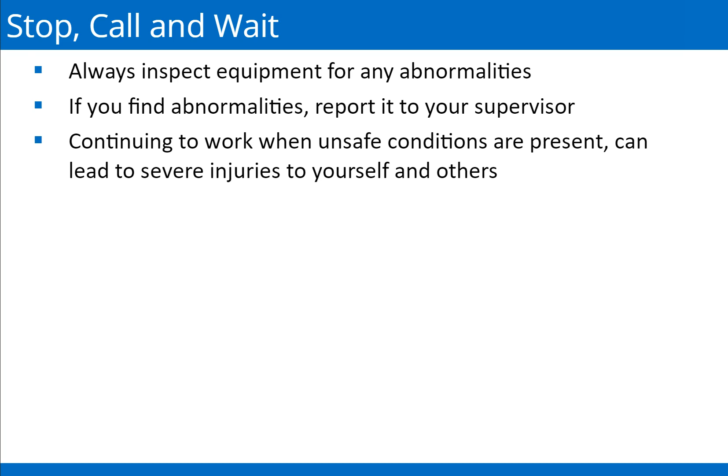When you observe an unsafe situation, follow this sequence of steps. 1. Stop. Stop what you are doing and press the emergency stop. 2. Call. Immediately call your supervisor or manager to notify them of the issues or concerns you are experiencing with your machinery. The third step is wait. Wait for your supervisor to inspect the unsafe conditions and take necessary corrective actions. Continue working only after safe working conditions are met.

Core safety rules apply to all departments, no matter what job is being performed. The core safety rules only cover general safety knowledge. Rule 1. Wear personal protective equipment, or PPE, where required.

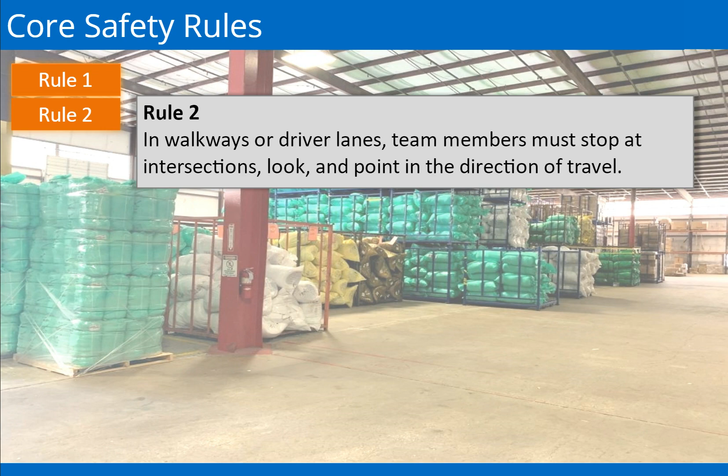Rule 2. At every intersection, team members who are walking or driving a vehicle must stop, look, and point in the direction of travel prior to moving forward. Rule 3. If a team member believes they are in a dangerous situation, they must immediately leave the area of perceived danger and contact a supervisor to report the situation.

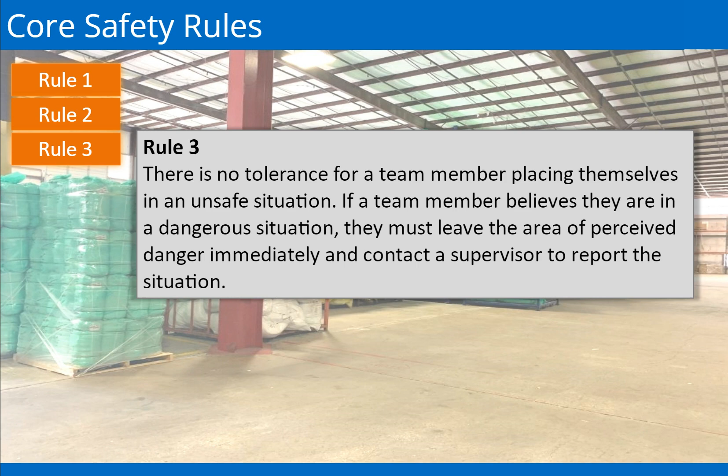Rule 4. Removing, bypassing, or modifying a machine guard or safety device is prohibited. Do not use a machine if the guard or safety device has been removed or compromised.

Rule 5. Lockout, tag-out procedures must be followed. No team member is to use equipment that has been locked or tagged out by another team member. Equipment that has been tagged can only be restarted by authorized personnel.

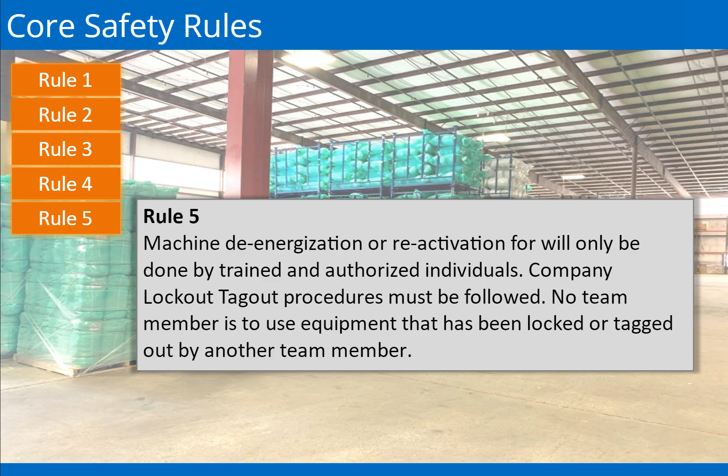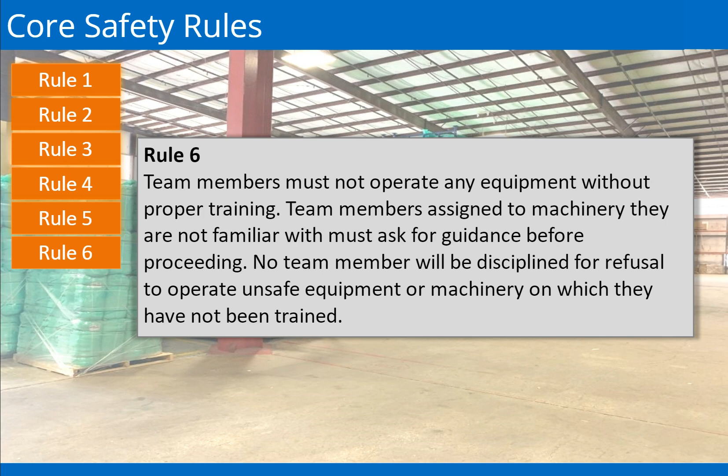Rule 6. Team members must not operate any equipment without proper training. If you are unfamiliar with a machine, you must ask for guidance before starting the machine. No team member will be disciplined for refusing to operate unsafe equipment or machinery on which they have not been trained. Rule 7. All unsafe acts, equipment malfunctions,

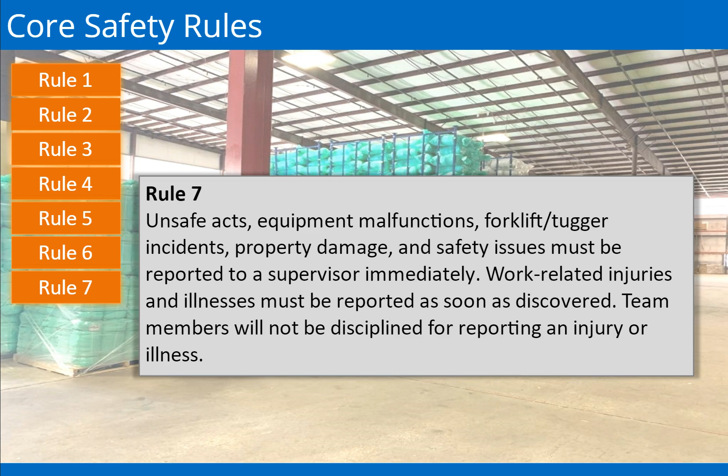forklift/tugger incidents, property damage, and safety issues must be reported immediately to a supervisor. Work-related injuries and illnesses must be reported as soon as discovered. No team member will be disciplined for reporting an injury or illness.

Rule 8. The operation of any powered, industrial equipment must include authorization, training, and approval prior to use. Operators must comply with all safety standards established for the equipment, which includes, but is not limited to, operation of a forklift, tow motor, crane, and any other electrical equipment.

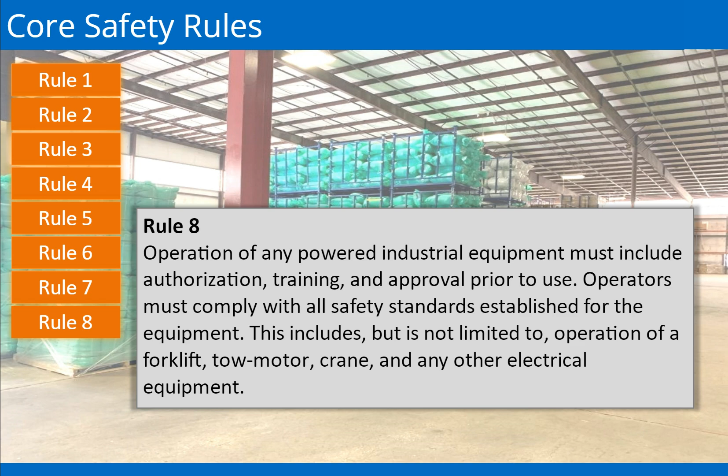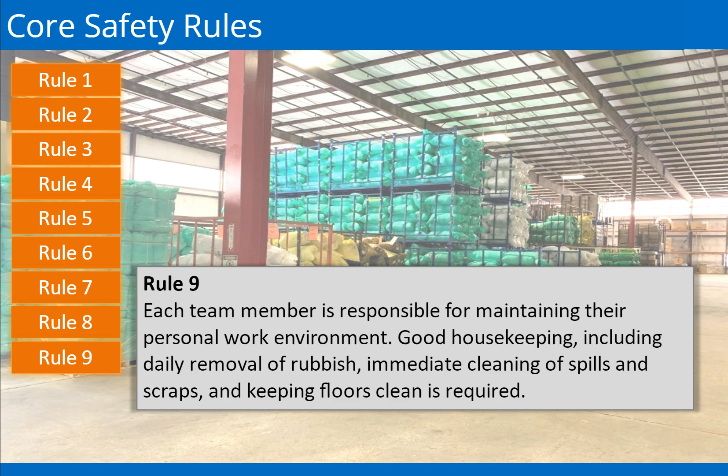Rule 9. You are responsible for taking care of your personal work environment. Good housekeeping includes the daily removal of trash, the immediate cleaning of spills, and maintaining clean floors.

Rule 10. All team members and associates are required to enforce the company's safety rules. Failure to comply will result in progressive disciplinary action.

All equipment and machinery are designed for safe operation as long as all the safety requirements are met. Each piece of equipment has a specific safe operating procedure that must be followed. Familiarize yourself with the equipment operation rules before operating equipment or machinery.

Rule 1. Before operating any equipment, always inspect the equipment to ensure that it is safe to use. Any unsafe conditions should be immediately reported to your supervisor. Working when unsafe conditions are present can lead to unnecessary injuries to yourself and to others.

When you observe unsafe conditions, use the stop, call, wait process. This process consists of: 1. Stop what you are doing, and press the emergency stop button if it is safe to do so. 2. Call your supervisor, lead, or manager to notify them of the issue or concerns you are experiencing with your machinery. And 3. Wait while your supervisor inspects the unsafe conditions and takes necessary corrective actions to ensure safe working conditions.

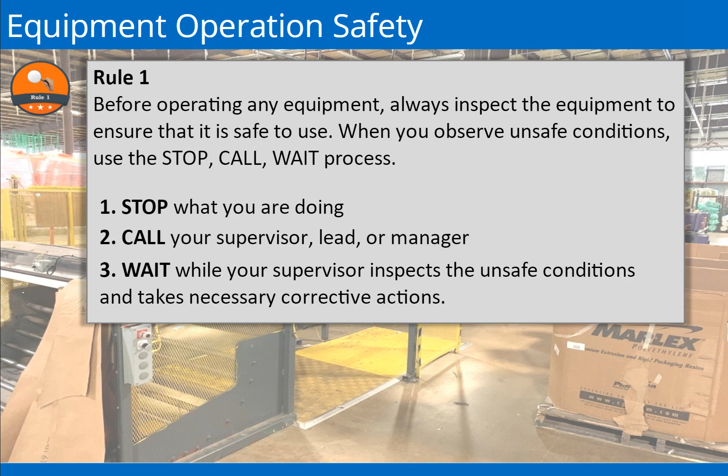Rule 2: Do not attempt to clean, operate, or repair machines unless trained and authorized by the company.

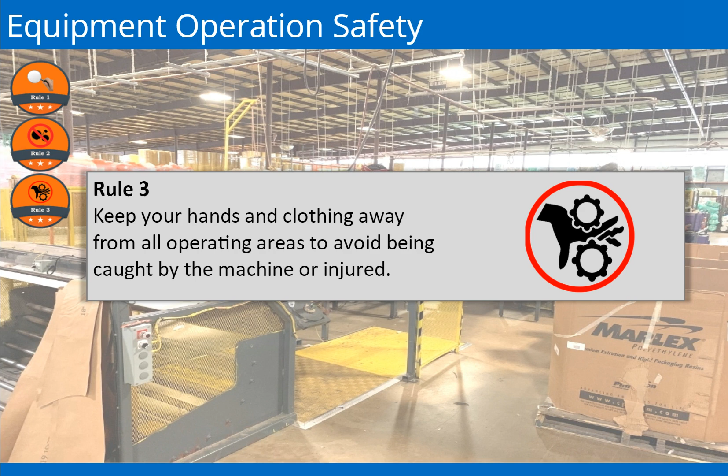Rule 3: Keep your hands and clothing away from all operating areas to avoid being caught by the machine or injured. Rule 4: When working around pieces of rotating equipment, wearing gloves can increase the chance of the operator being pulled into the machine, resulting in limb amputation or death.

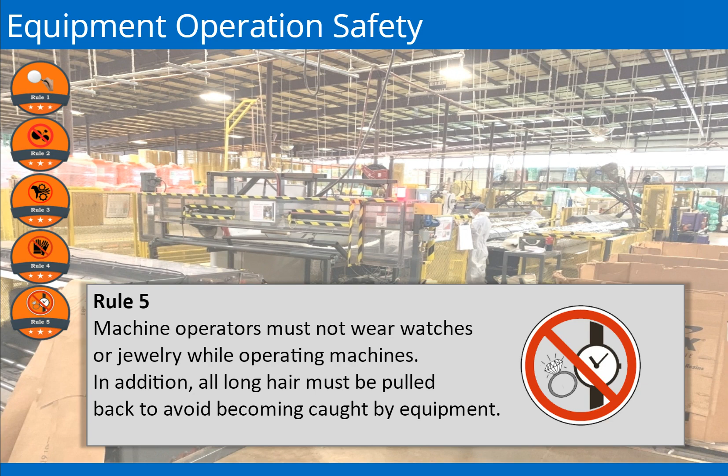Rule 5: Machine operators must not wear watches or jewelry while operating machines. Jewelry can get caught in power tools, conveyors, and moving parts of machinery. Wearing jewelry can also result in electric shock. In addition, all long hair must be pulled back to avoid becoming caught by equipment.

Rule 6: All equipment have emergency stops, also known as e-stops. Ensure that you are familiar with the location of the emergency stop for your equipment. If you are not sure, ask your supervisor.

Rule 7: Never leave a running machine unattended. Always turn off a machine before leaving your station. Never bypass safety locks, remove, or tamper with machine guarding.

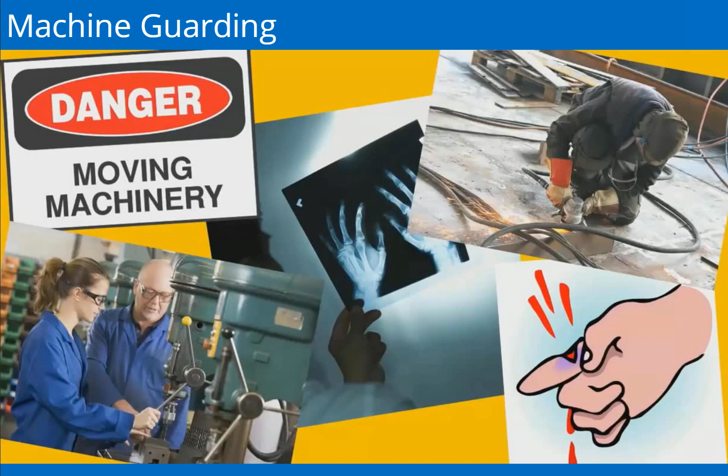Moving machine parts have caused severe workplace injuries like crushed fingers or hands, amputations, burns, blindness, and fatalities. Machine guards are engineered to protect workers from becoming injured.

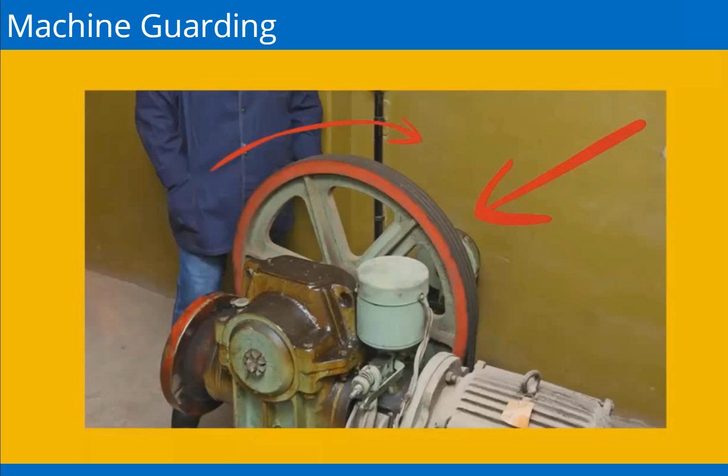If a piece of your clothing got caught up in the moving wheel, it would pull your entire body in and cause severe, and in many cases, fatal injuries.

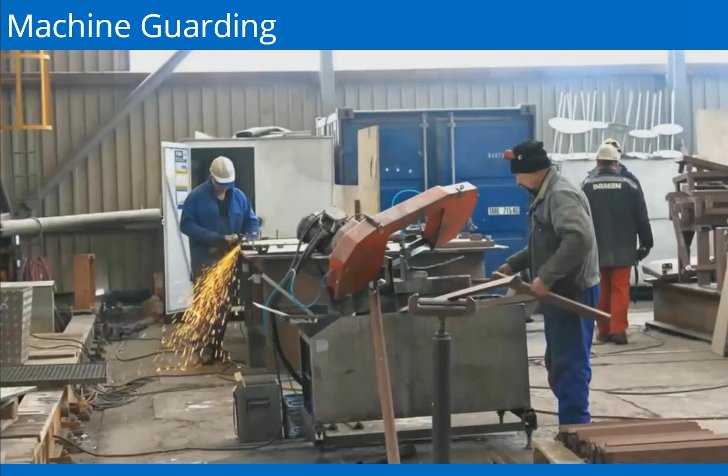Machine guards also reduce the hazards from sparks or broken machinery. Accidental contact is a major risk during the operation of a machine. Working around any moving machinery has potential hazards. Know the hazards and control them before and during operation.

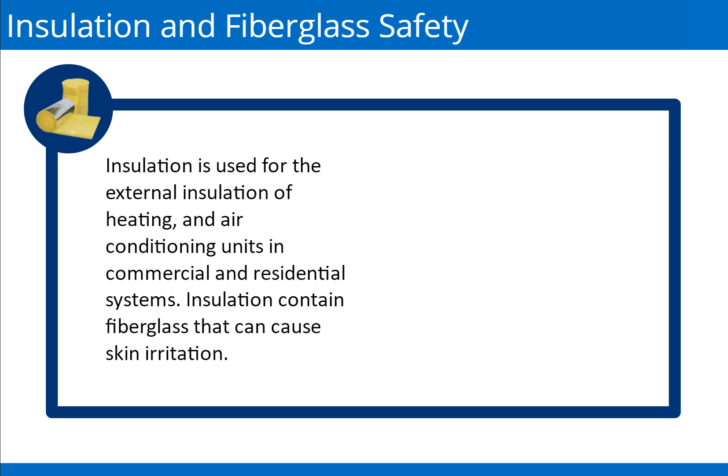Insulation is used for the external insulation of heating and air conditioning units in commercial and residential systems. Insulation contains fiberglass that can cause skin irritation. If exposed to fiberglass, to avoid irritation, you should immediately use the barrier creams located at the facility.

We care about the health and well-being of all of our people. If you are hurt or injured on the job, you must immediately inform your supervisor. You will be escorted by your supervisor to the first aid room. If the injury is an emergency that requires outside medical attention, report back to the medical office or your supervisor as soon as you are released.

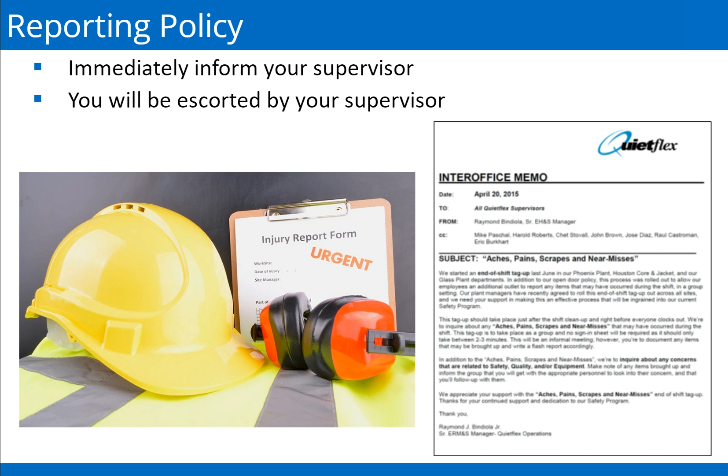Incidents that need to be reported during the aches, pains, scrapes, and near misses end-of-shift tag-up include unsafe acts or conditions, near miss incidents, and injuries. In addition, concerns related to safety, quality, and/or equipment such as property damage, fires, and spills.

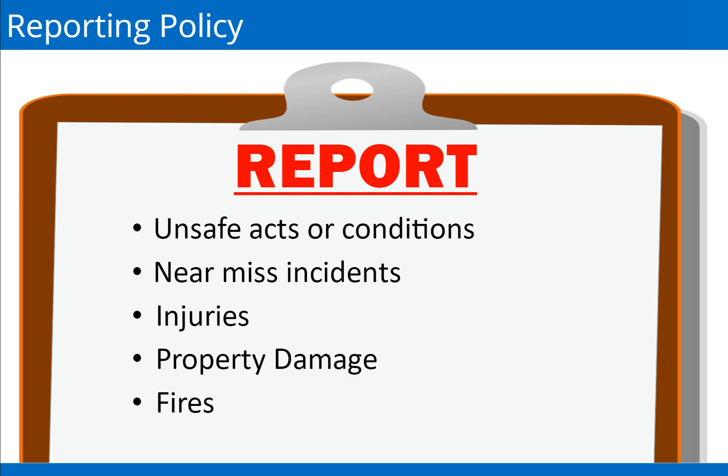Personal appearance, proper hygiene, and appropriate attire are important to the work environment. Team members are expected to report to work wearing clothing appropriate to their position.

Appropriate and inappropriate attire includes shirts. It is mandatory that shirts must have sleeves. Cut-off shirts are not allowed. Bottoms: full-length pants are required. Shorts or capri pants are not allowed.

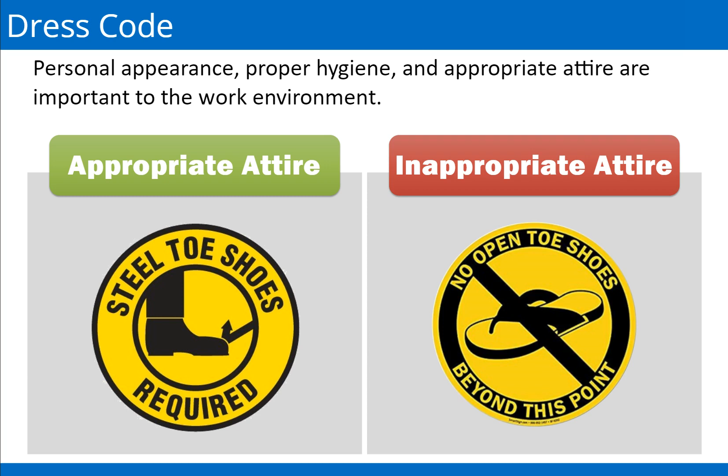Shoes: steel-toed shoes are mandatory on the manufacturing floor. Flip-flops or any other footwear that exposes your toes or top part of your feet are not allowed on the manufacturing floor. Glasses: clear safety glasses with an ANSI rating of Z87 are required.

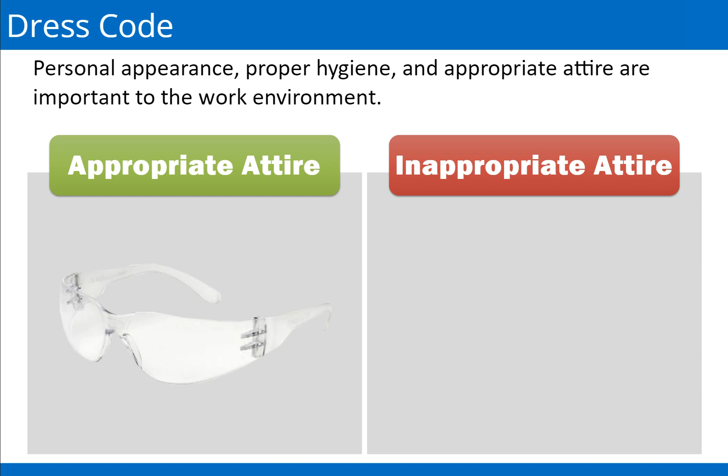In addition to the ANSI rating of Z87, prescribed safety glasses must include side shields. Tinted glasses are not authorized. Hair: long hair must be pulled back to prevent being caught in equipment. Identification: team member ID badges must be worn and visible at all times.

For team members at Quietflex, the right tool for the job often calls for a box cutter. A box cutter is a cutting tool that is designed to cut and open objects and typically consists of a retractable blade. Box cutter blades are sharp and can cause cuts or punctures to your hands if used improperly.

To prevent injuries while using a box cutter, consider the following: ensure you are using authorized box cutters and blades.

Do not bring box cutters, blades, or knives from home. Use what is provided by the company. Only use self-retracting box cutters, which allow the blade to hide. The blade must be rounded off. No pointed edge blades are allowed. Properly store your box cutter when it is not being used. Always cut away from your body.

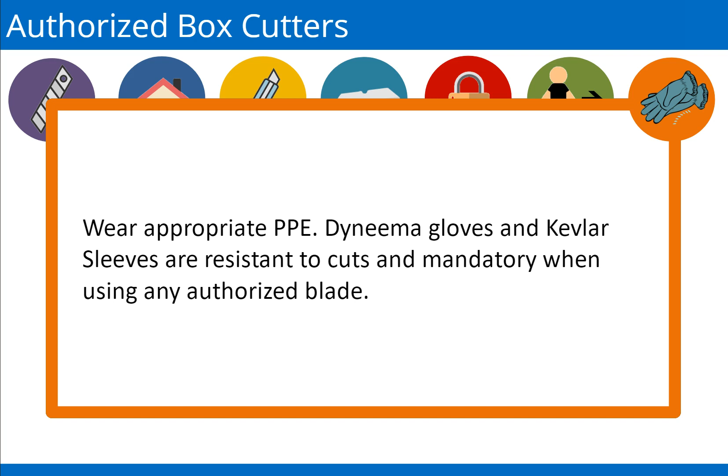Wear appropriate PPE. Dyneema gloves and Kevlar sleeves are resistant to cuts and mandatory when using any authorized blade. If you are not sure if your blade is authorized, practice stop, call, wait, and verify with your supervisor.

All duct operator and bagger stations have their own emergency stop button. Prior to climbing onto the table, you must ensure the e-stop button is engaged. If the puller or pushers are still in motion after pressing the e-stop, inform your supervisor immediately. Do not climb on the table. It is important that you become familiar with the e-stops on your line.

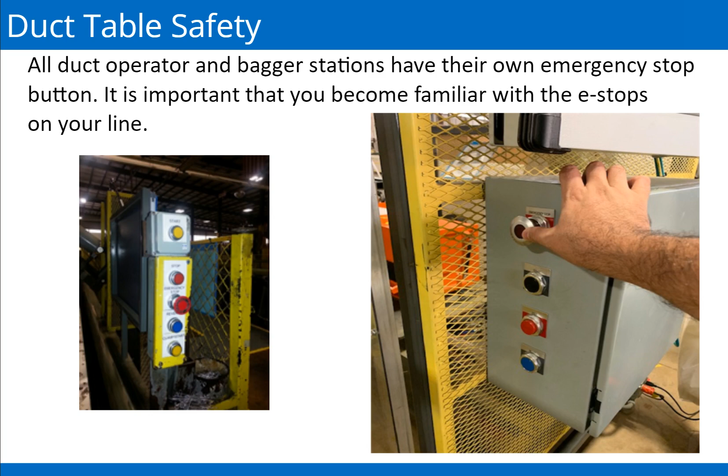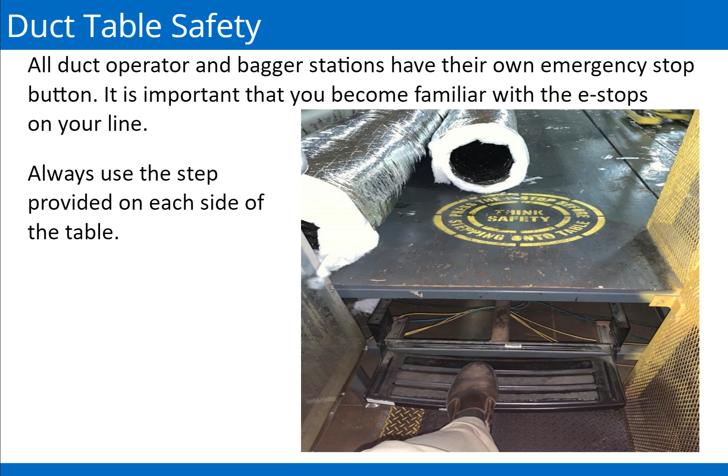Always use the step provided on each side of the table when getting on and off the table, and use caution near the table gap on the double-sided compression tables.

While on the manufacturing floor, pedestrians need to follow extreme caution because there is always a lot of foot and motor traffic. When crossing an intersection, always follow stop, look, point. The following video demonstrates proper stop, look, and point techniques.

There are additional safety concerns when walking on the manufacturing floor. First, always remain in the designated pedestrian walkways. The lines are meant as a guide to keep you in the safe zone.

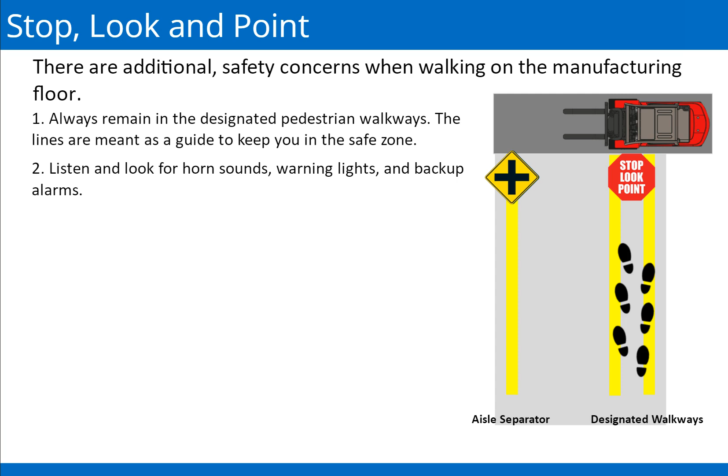Second, listen and look for horn sounds, warning lights, and backup alarms. Third, do not approach a forklift until the operator indicates that it is safe to do so. Maintain at least a 36-inch clearance from operators. Remember, forklifts steer from the rear. Fourth, forklift drivers are required to stop at every intersection.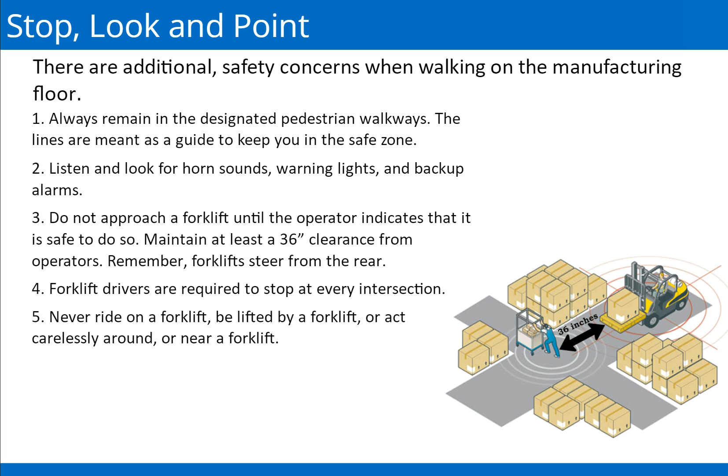Fifth, never ride on a forklift, be lifted by a forklift, or act carelessly around or near a forklift. Sixth, pedestrians always have the right-of-way. Seventh, when a blue light is visible, stop. A forklift's bright blue light on the floor is clearly visible to pedestrians and vehicles, alerting them of a nearby presence of the forklift.

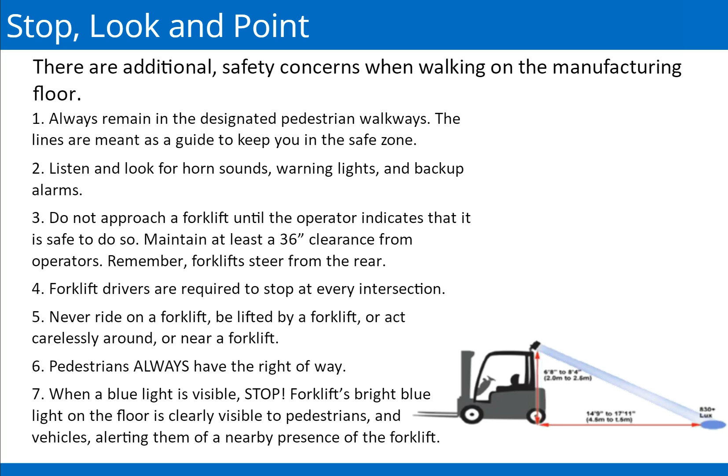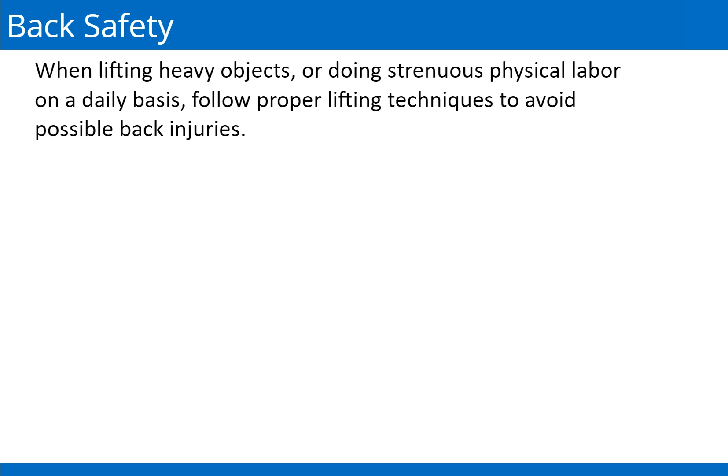When you are lifting heavy objects or doing strenuous physical labor on a daily basis, follow proper lifting techniques to avoid possible back injuries. Back safety in the workplace is very important. The following video demonstrates proper techniques to avoid back injury when lifting heavy objects.

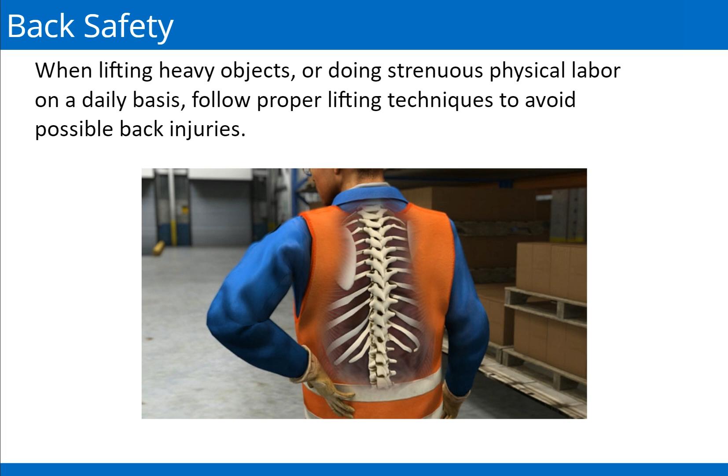Now let's look at the correct way to lift an item from a pallet. First, move your feet as close as possible to the edge of the pallet. Don't bend over from further away to save time.

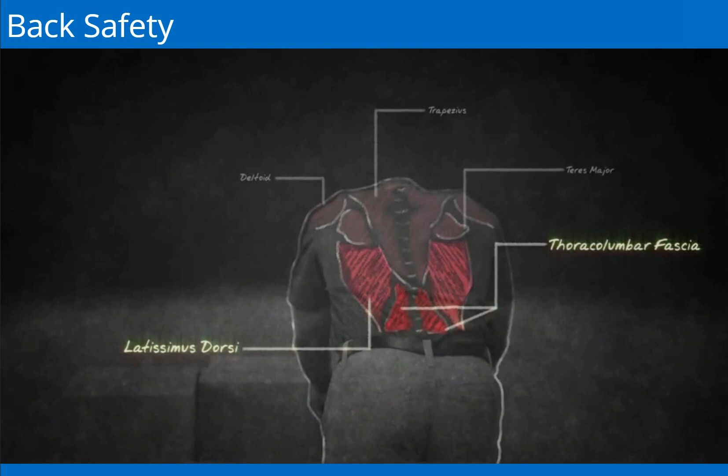Slowly lift with the power coming from your legs, raising the load close to your body. Keep your elbows in and try to keep your spine in its normal position. Tighten your stomach muscles and lift smoothly without jerking.

Turn your feet to rotate, not your back. Twisting puts a lot of pressure on the soft tissues of your spine. When you set down or lift a load, most of the power should come from your legs.

Use the lateral lunge when reaching to the back part of a low pick slot. Your feet should be wider than shoulder width, and your hips should be centered over the lead leg.

For items at or above shoulder height, hold the item closely, putting one foot slightly forward. Use a rocking motion to move the item, like so. Slowly shift the weight from your back foot to your front foot, and then push the item onto the pallet.

Pre-shift stretching and warm-up exercises reduce the risk of injury by decreasing fatigue and improving muscular balance, posture, and muscle coordination. Pre-stretches are required by all departments prior to the beginning of a shift.

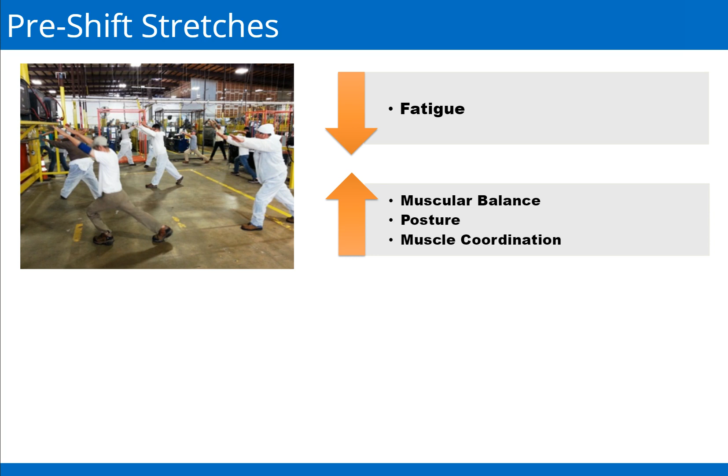During pre-shift stretches, the supervisors lead team members through exercises. If you happen to miss your department group stretch, it is important that you stretch on your own.

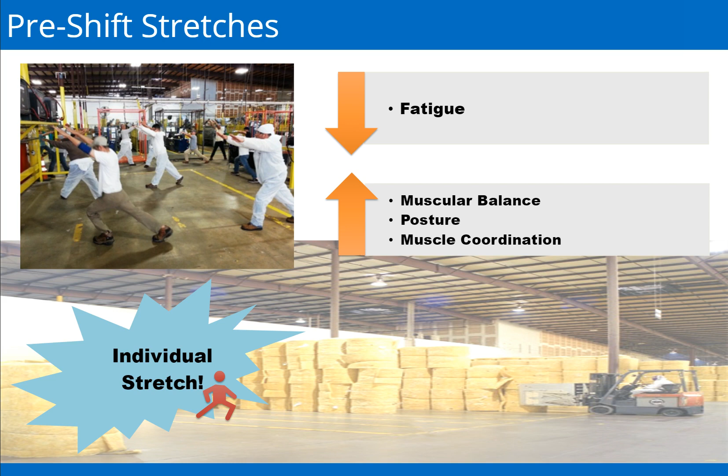Working on the manufacturing floor, you are exposed to particulates that may get in your eyes. To minimize the possibility of injuring your eyes, never rub your eyes, even if you think it is just dust. Always use the eye wash station.

An eye wash station is a device that can protect against chemicals or substance-related eye injuries. To use the emergency eye wash station, push the lever forward. Immediately flush eyes for at least 15 minutes, and keep the eyes open and rotate the eyeballs in all directions to remove contamination from around the eyes.

An injured person may need help holding the eyelids open. Let's watch a video on emergency eye wash.

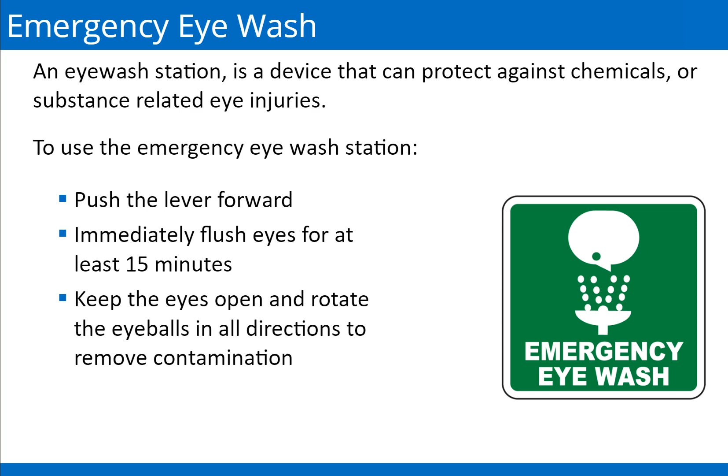Where are your eye wash stations? When will you need them?

Dirt, dust, or chemicals can be stirred up in the air and get blown into your eyes. Chemicals or other materials can be splashed onto your face and into your eyes. Anything on your hands or gloves, particles, chemicals, or other materials can get rubbed into your eyes.

If something like a corrosive chemical gets into your eyes, the first few moments are the most critical. Damage to the eyes starts immediately, so the quicker you get emergency first aid, the more you limit the amount of damage. That's why you need to know where the emergency eye wash stations are located. It is important to know where they are and how to use them.

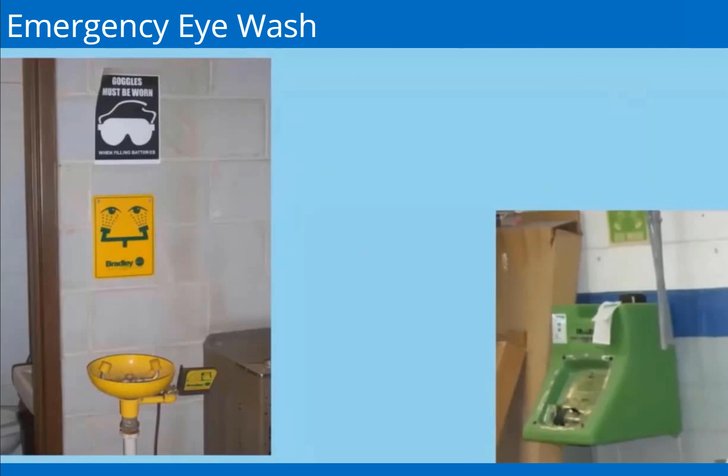Once you locate the eye wash station, familiarize yourself with how it operates. Is it full and operating normally? Do you know how to work it? When was the last time it was inspected? Stations should be tested monthly to be sure they are correctly maintained and operating properly.

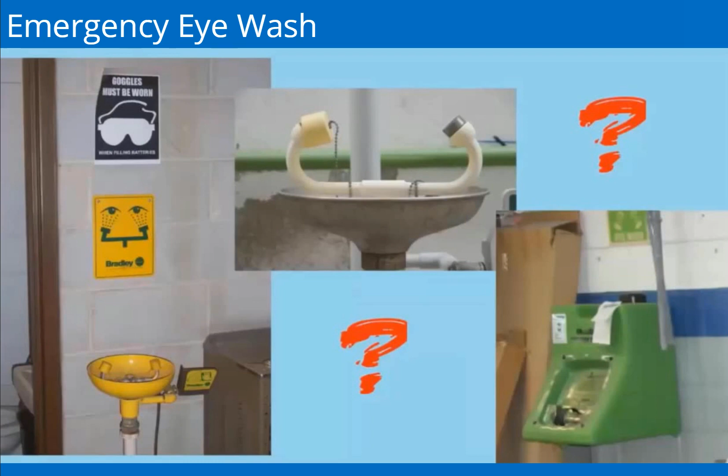Is the route to the station clear and unobstructed? Keep a clear, unobstructed path to the emergency eye wash. Remember that water does not neutralize contaminants. It merely dilutes them and flushes them away.

If the nature of the contaminant is not known, flush for a longer time. A normal emergency station should provide a full, thorough flush for at least 15 minutes. Small bottles are not considered emergency eye wash stations. They are to be used while the person is being taken or traveling to the larger eye wash station.

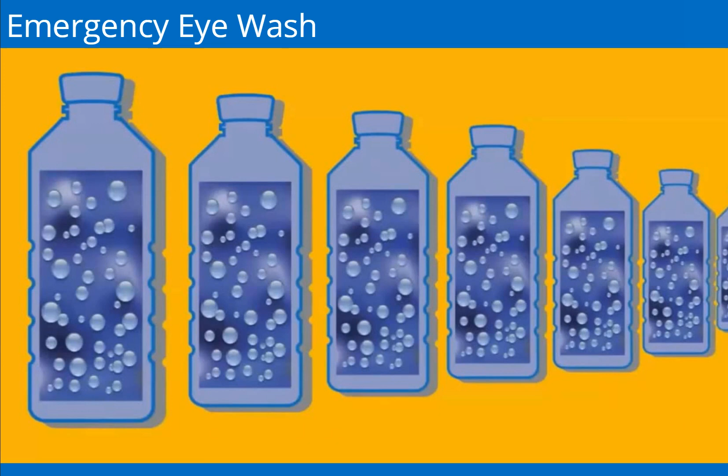Know how to protect your eyes. Your vision is critical. Thanks for watching.

During the servicing and maintenance of machines and equipment, the unexpected release of stored energy can result in serious injury or death to team members. Lockout tagout is a safety protocol maintained by our company to protect team members from these hazards. All team members must be able to identify lockout tagout, locks, and tags.

If lockout tagout is being performed on your machine or line, notify your supervisor. Do not try to restart equipment. Do not push the on button. Do not operate or use equipment.

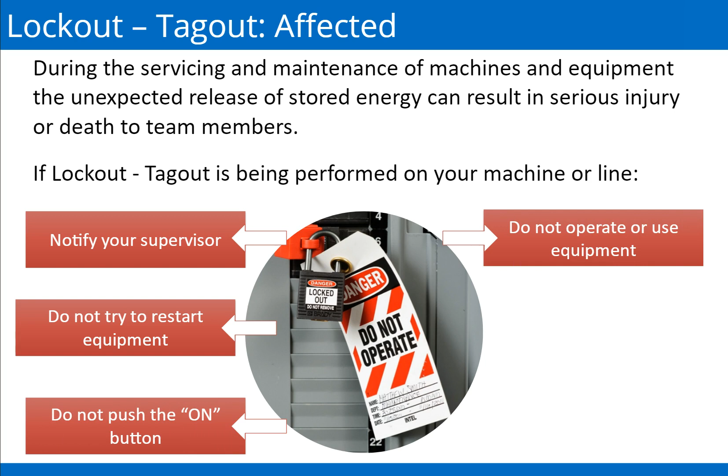Never remove another team member's lock or tags. And never restart equipment with a lock or tag.

Protecting storm drains is essential because unlike the water that goes down your drain to the sewer, water that flows into storm drains is not treated and filtered for pollutants. Storm drains empty the polluted water directly into streams and rivers with no treatment. Polluted water degrades our nearby water sources.

It is our responsibility to regulate the contaminants that flow into the drains. Never allow or pour any liquids, such as oil, chemicals, or paints, into the stormwater drain.

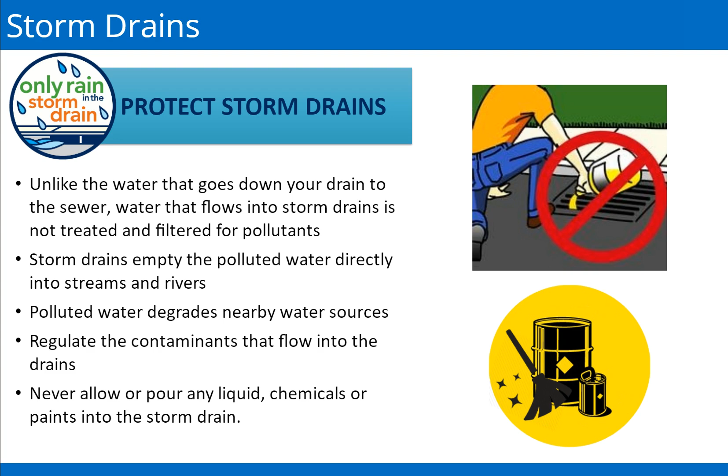If you puncture a tote or drum with a forklift, leave the forks in to minimize spills. Flip the drum or tote with the punctured area upwards to stop any spills. And immediately report all spills to your supervisor. Remember, storm drains are designated for rainwater only.

Quietflex conducts yearly evacuation and shelter-in-place drills. Familiarize yourself with the facility evacuation plan and recognize the alarm signals. In the event of a fire emergency, you should walk to the closest exit and report to the emergency assembly area. In the event of a weather emergency, you should report to the nearest emergency shelter.

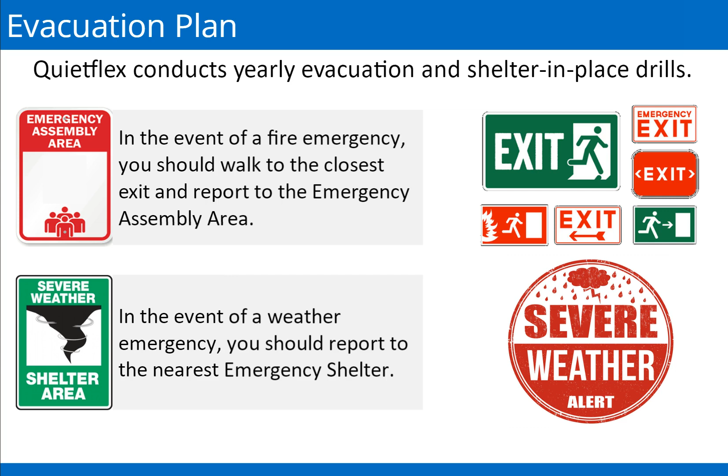Ask your supervisor for more information. During a drill or actual event, remember, once alarm is sounded, all team members must go to the emergency assembly area. No one is allowed to leave the premises during a drill or actual event.

Walk with urgency. Do not text and walk. Smoking is not allowed at the emergency assembly area. Do not re-enter the building for personal belongings. And practice makes perfect. Take all drills seriously.

ISO 14001 is an environmental management system standard that provides the organization with a structure to reduce its impact to the environment and assures compliance to regulations. Quietflex is proudly ISO 14001 certified.

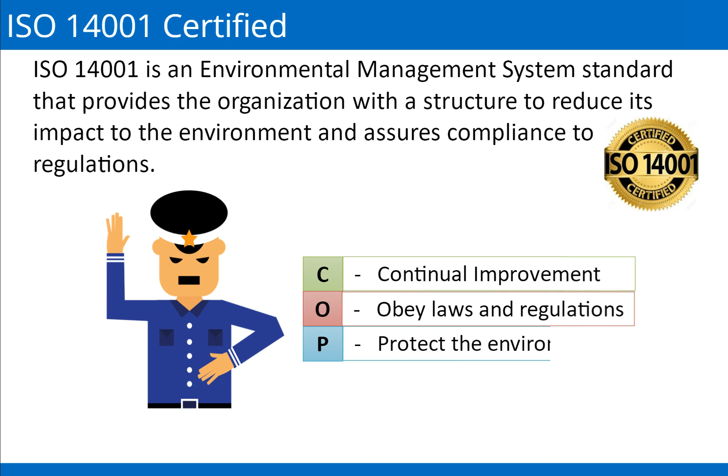The essence of our environmental policy is COP. C stands for continual improvement. O stands for obey the laws and regulations. P stands for protect the environment.

Our environmental slogan is keep it clean, keep it green. We always keep our company facility clean and green. As a company, our environmental objectives are CPR.

1. Conserve resources. We evaluate the use of all materials to assess less and non-hazardous alternatives. We also make a good effort to minimize waste generation. 2. Prevent pollution. Our company is firmly committed to the protection of the environment and prevention of pollution.

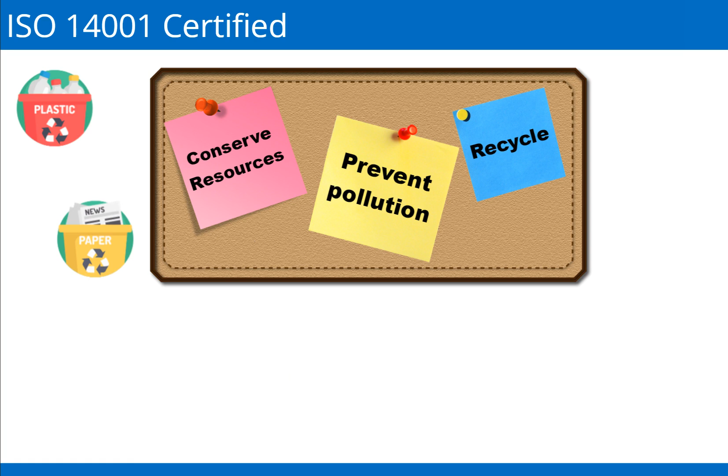3. Recycle. We make a good effort to recycle and reuse materials and properly dispose all the waste in accordance to state and federal regulations.

At Quietflex, we take pride in maintaining a clean, clear, and bright workspace. Good housekeeping practices promote a safe work environment. All team members should follow these housekeeping rules.

1. Dispose of trash properly. Do not leave your trash laying around for someone else to pick up.

2. Take initiative to keep your work area clean. Keeping items neat and orderly promotes efficiency.

3. A neat factory promotes a sense of quality that can be associated with the products. And 4. Maintaining a clean work area is everyone's responsibility.

The use of personal phones distracts many people. Personal cell phones are strictly prohibited on the manufacturing floor. This rule applies to all team members, including forklift operators.

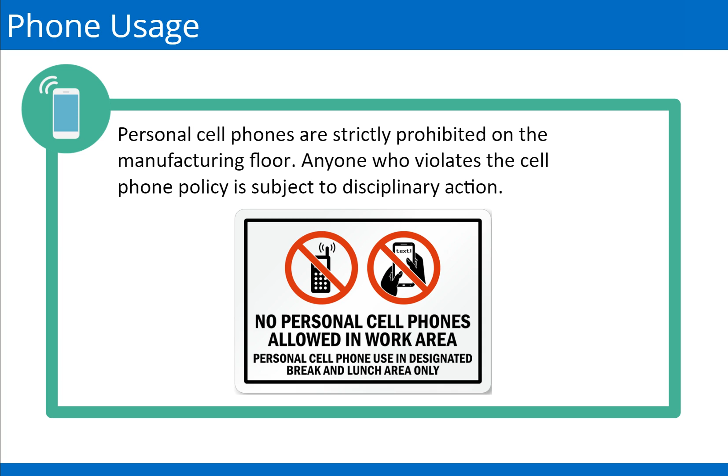You can use your cell phones in the lunchrooms and oasis break areas. Anyone who violates the cell phone policy is subject to disciplinary action. In addition, prior to using a production radio, you must come to a complete stop.

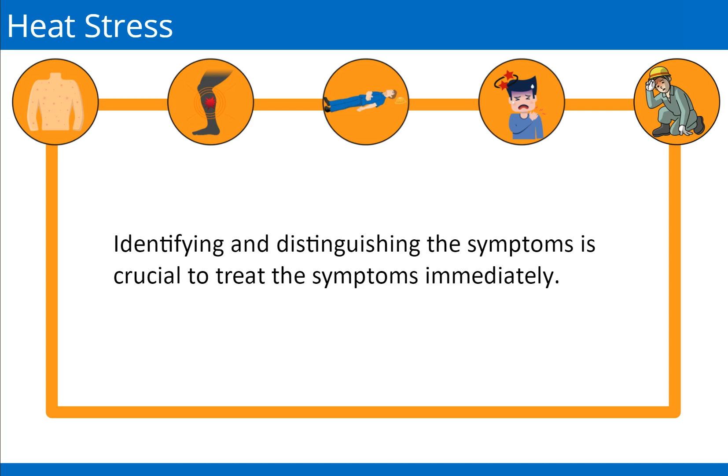Heat stress can take different forms, from a simple heat rash to a more serious form, heat stroke. Many times people confuse these disorders, but it is crucial for people to distinguish the differences. Identifying the correct type of illness helps them take proper steps to treat the symptoms.

Heat rash typically occurs when sweat is trapped against the skin and cannot evaporate due to restrictive clothing. The parts of the body most commonly affected are the neck, upper chest, groin, and elbow creases. When the rash covers a large area, or if it becomes infected, it may become very uncomfortable.

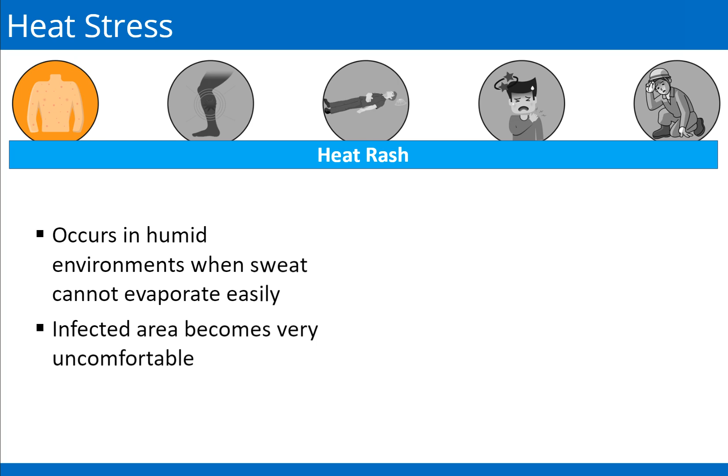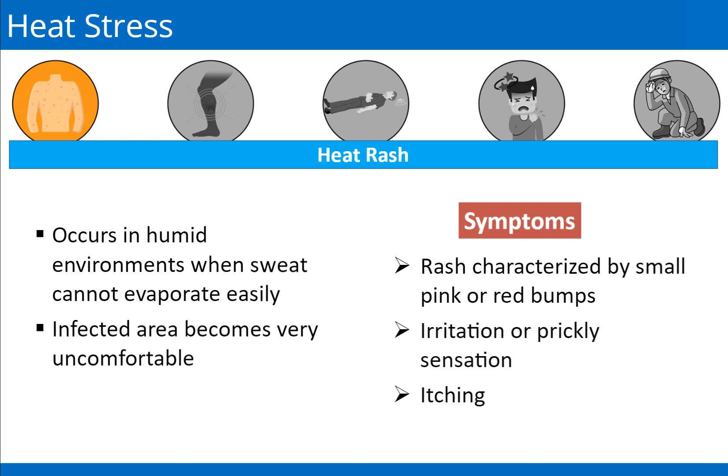The signs and symptoms of heat rash include rash, characterized by small pink or red bumps, irritation or prickly sensation, and itching.

Heat cramps can occur during hard physical labor in a hot environment. Cramps are caused when heavy sweating leads to improper levels of sodium and electrolytes in the body. The signs and symptoms of heat cramps include cramping or spasms of muscles. This may occur during or after the work.

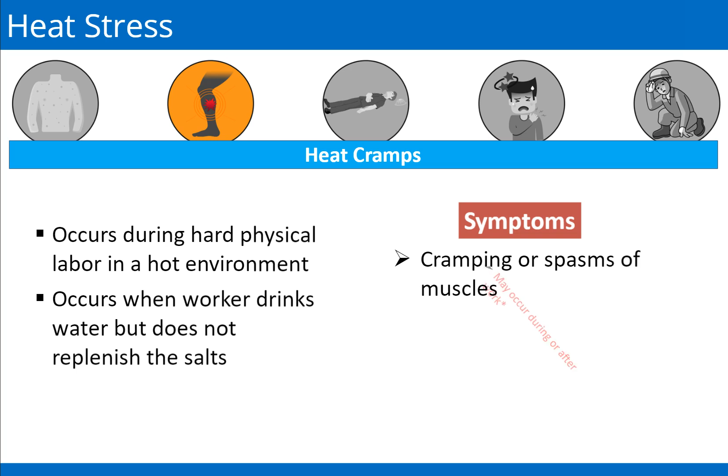Heat syncope occurs when blood pools in the body's extremities, leaving the brain with little oxygen. It typically happens when a person tries to stand up from a sitting or lying position. This can be increased by exposure to excessively hot environment and dehydration.

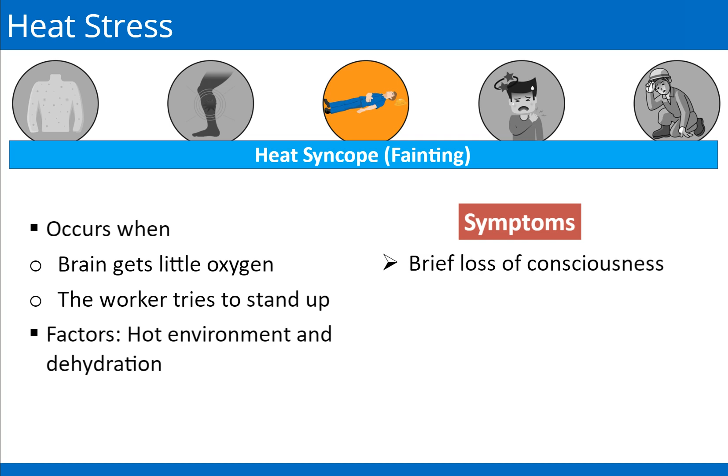The signs and symptoms of heat syncope include brief loss of consciousness, sweaty skin, normal body temperature, and no signs of heat stroke or heat exhaustion.

Heat exhaustion occurs when the body's core temperature rises above 100.4 degrees Fahrenheit. This is usually caused by a combination of high temperatures and dehydration from heavy sweating. A simple way to describe the appearance of a worker is 3 W's: wet, white, and weak.

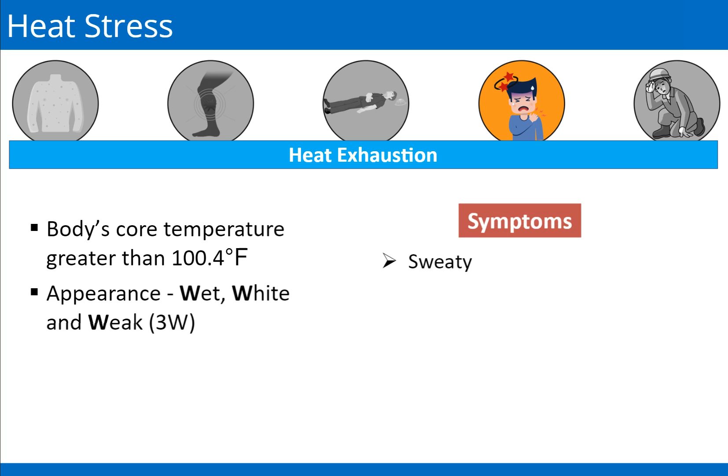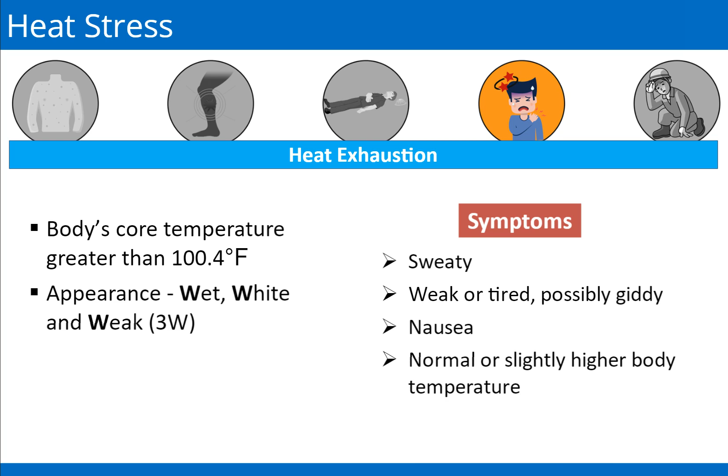The signs and symptoms of heat exhaustion include excessive sweat, feeling weak or tired, possibly giddy, experiencing nausea, normal or slightly elevated body temperature, and pale or clammy skin.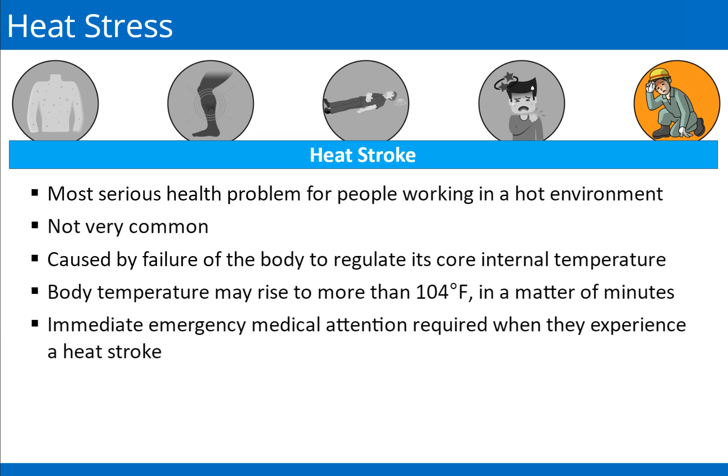Heat stroke is the most dangerous heat-related medical condition, though not very common. It occurs when the body can no longer control its internal temperature. The body's temperature may rise to 104 degrees Fahrenheit or higher in a matter of minutes, causing a full medical emergency. Any person suffering heat stroke needs immediate emergency help.

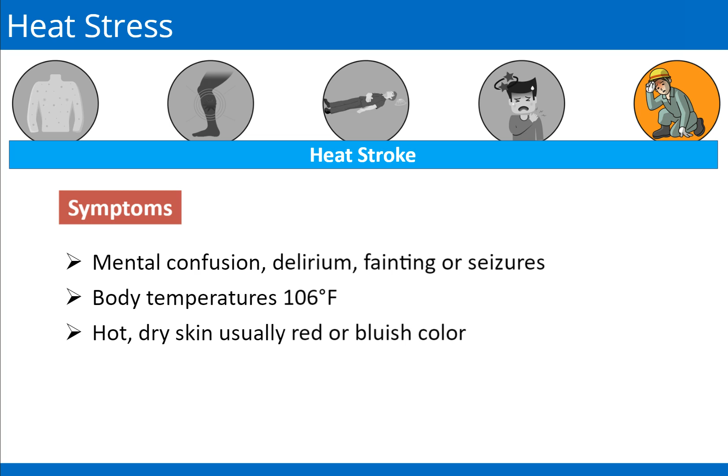The signs and symptoms of heat stroke include mental confusion, delirium, fainting, or seizures. Body temperature probably 106 degrees Fahrenheit or higher. Hot and dry skin, usually red or bluish in color. And lack of sweating. There are many reasons to work safely.